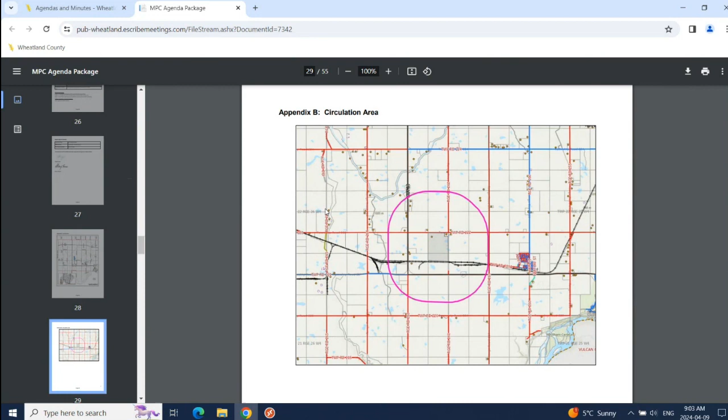Alberta Transportation and Economic Corridors said the Highway 24 recommended improvements identified in the TIA should be constructed prior to the opening day of the facility, at no cost to AT. A development application for the highway improvements should be submitted to AT, and the application for the highway intersection improvements should include detailed engineered plans: an asphalt pavement report, subgrade and gravel base course details, and any other applicable plans not mentioned.

CP Rail had no response. Fortis had no response. Rocky View County noted the project is outside of the IDP area, and since no concerns were raised during the redesignation, they were not circulated for the development permit. The comments provided during the redesignation were included in the development permit report.

During our internal circulation, we received comments from the manager of operations, who said it is recommended by the Transportation Department that all Highway 24 and Township Road 222 intersection improvements be completed as noted within the TIA and the AT permit. Though anticipated post-development traffic volumes fall slightly below the threshold for paving, it is recommended that paving of Township Road 222, from Highway 24 to the furthest east development access, be completed following reconstruction of the roadway by the county. It is anticipated that the maintenance demands of the roadway, if it remained gravel, would be greater than could be provided through the county's existing service levels.

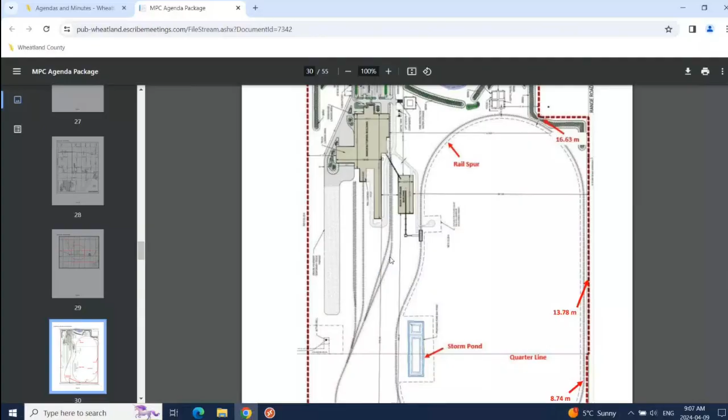On page 30, we have the site plan. A little description of the proposal.

The application proposes the development of a 220,000 square foot wallboard manufacturing plant, including an associated raw product processing mill and an enclosed storage facility for manufactured wallboard products. The facility will encompass approximately 214 acres of land, currently on 2 parcels. However, the applicant landowner is in the process of consolidating the 2 parcels through land titles.

Environmentally sustainable practices will be incorporated, including advanced environmental control systems to minimize emissions and a solar array for power supply. A separate application will be submitted for the solar array in early 2025.

The plant anticipates employing approximately 100 permanent staff members working in 3 shifts. The facility will operate 24 hours a day, 7 days a week throughout the year. Customers will not interact directly with the manufacturing facility, so regular client-customer visits to the plant are not expected on a daily or weekly basis.

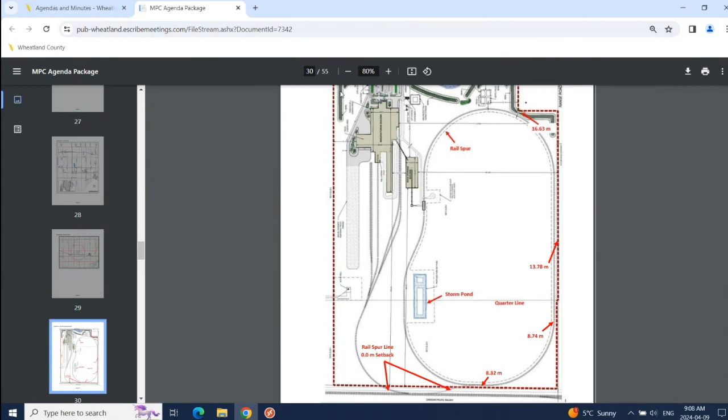A traffic impact assessment was submitted, which was reviewed by McElhanney Engineering, Alberta Transportation, and the county. It identified the largest traffic contributor to be employee traffic arriving and departing from their work shifts. Additionally, truck traffic is expected to be relatively steady throughout the day, approximately 5 trucks per hour.

The TIA recommended that improvements be constructed at the intersection of Highway 24 and Township Road 222. Although the TIA stated that the estimated traffic volume did not trigger the requirement to pave Township Road 222, the County Transportation Department noted that the TIA did not take the current standard of the road into consideration and did recommend the road be paved from Highway 24 to the furthest east development access.

There is a map to our site plan on page 30. There is an active CP rail line that runs from east to west immediately south of the development site. A direct rail connection, or a spur line, is being proposed for the site to transport materials and finished products.

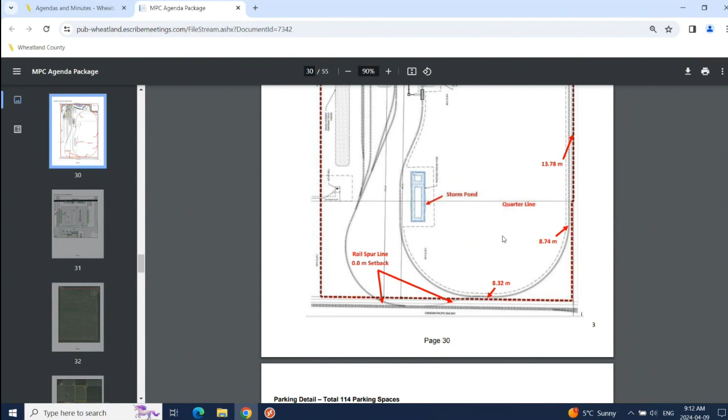Wastewater servicing and disposal is proposed by means of a conventional septic chamber system and treatment field to treat domestic wastewater from toilets, sinks, and showers in the office. The basis for the septic field design was the maximum daily population, estimated to be 119 people.

Wastewater generated during the manufacturing process will be captured and reused in the manufacturing process.

Stormwater management: a stormwater management system is designed to accommodate the 100-year storm event runoff, and it will be conveyed to the stormwater pond where it will be stored. The pond will permanently maintain a certain level of water, but after a rainfall event, the excess water will be discharged to vegetation on site. It will be monitored, sampled, and analyzed to ensure it meets applicable requirements before being discharged to landscaped and vegetated areas to allow for recharging of the shallow groundwater aquifer.

The landscaping and mitigation plan: a plan was submitted in support of the application, which includes extensive tree planting and berming. The plan was developed in alignment with the mitigation strategy outlined in the area concept plan and complies with the county landscaping and screening guidelines. Further details regarding the mitigation strategy are found in the policy analysis section of this report.

A construction management plan was submitted in support of the application. On-site stripping and grading would proceed upon the effective date of the development permit. Further construction activities will commence once the applicable agreements have been executed. The plan included strategies related to mitigating potential impacts related to dust control, turning off equipment when not in use, vehicle maintenance, containing runoff, covering trucks leaving the site, and regular site cleanup and washing truck wheels prior to leaving the site. A condition has been added to address construction hours in accordance with the county noise bylaw.

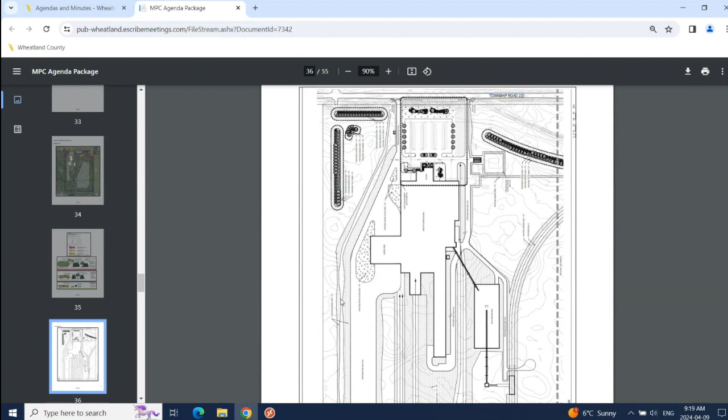Following discussions with neighboring residents who had raised concerns after receiving the circulation notice, amendments were made to the landscaping plan. MPC has received a copy of these amendments, but I will outline the changes for you.

Did MPC want me to read the entire email that came from the applicant or just review the changes? I believe we got it in time, so if you just review the changes, that'll be fine for everybody.

One of the landowners, after meeting with CGC, considered that the tree height atop some of the landscape berms at time of initial planting would not break up the bulk of the processing plant when viewed from his house to a level he's satisfied with.

The amendment was that CGC will replace 50% of the proposed 3-foot trees with 6-foot trees for a linear length of 50 meters along the northern boundary, starting in the northeast corner. So in this area here, they're going to increase the tree height at planting.

The applicant notes that this amendment combined with the 6-foot high berm will provide a screening height of 12 feet at planting. Together with the proposed irrigation system, this will help ensure trees quickly establish and gain further height. One of the other respondents they met with expressed a desire to continue to have a view corridor into the site.

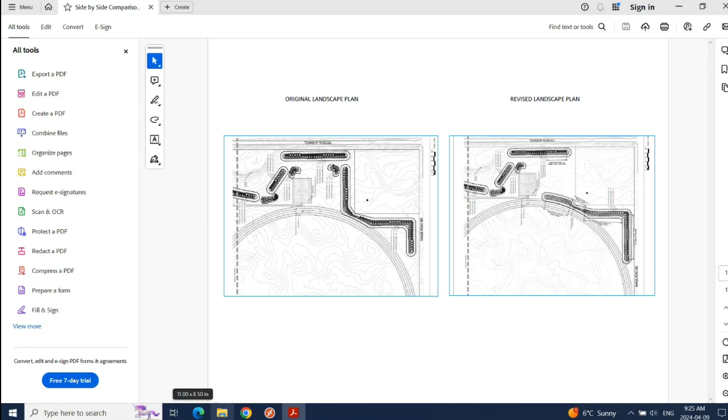I'm going to go back to our drawing on page 30.

Regarding variances, there are several required to accommodate the infrastructure and facility on this site. One is to the stormwater pond setbacks, as it is positioned in a location which straddles the property line between the northeast and southeast quarter. So a variance to the setback to the property line has been proposed. The applicant intends to consolidate the two parcels to create one large parcel, completed directly through the land titles office, and once the new parcel boundaries are registered, this variance would be moot. Here is the property line, the quarter line, and this is the storm pond. You can see the property line runs through it.

The railway spur setback relaxations: the rear property line is shared by CP Rail, and the spur line needs to cross over the property line to connect with the CP Rail main line. The land use bylaw requires a 3.05 meter setback from development to a property line not adjacent to a road allowance. But due to the rail spur line connecting to the CP Rail line, it must cross the property line shared by CP Rail to the south, requiring a variance allowing a 0 meter setback to the property line on the south. A variance allowing a 0 meter setback to the property line between the two quarters is required to allow the rail spur line to cross over between the two parcels. Again, once the two parcels are consolidated, this variance would no longer be required.

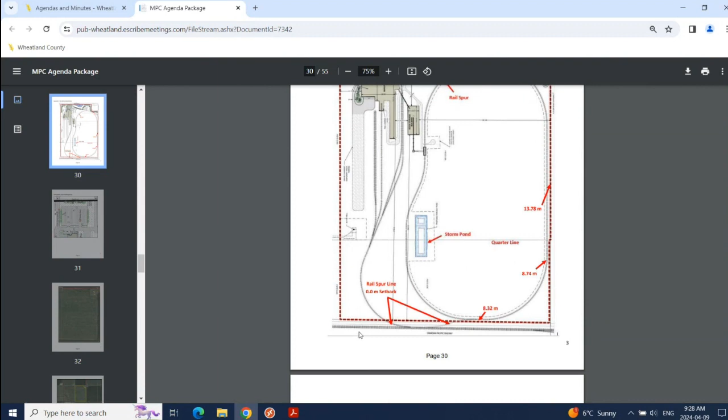McElhanney reviewed the assessment and has no concerns with the proposed reduction of the parking requirements from 220 to 114 based on the rationale provided. The rationale was that the assessment considered the start and end times of employees who will be working in 3 shifts and prepared for the maximum overlap in parking demand.

Land use bylaw section 4.3 grants the development authority the option to approve a development permit even though the development does not comply with the land use bylaw, if those variances would not unduly interfere with the amenities of the neighborhood, materially interfere with or affect the use, enjoyment, or value of neighboring parcels, or the proposed development conforms with a similar use prescribed for that land. Staff is satisfied that the variance requests meet the criteria outlined in section 4.3 of the land use bylaw.

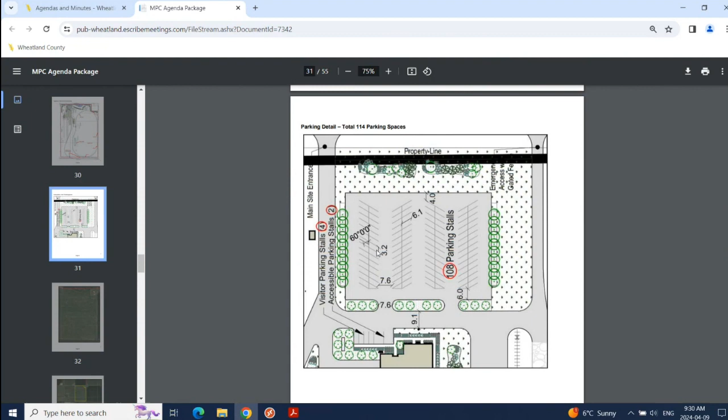Staff are recommending some amendments to the conditions, which I will outline for you after further consideration.

Oh, where are we here? There we go.

I'm going to show you the tracked changes so you can see the changes, and then I'll show you what it looks like once we've accepted them. First, this I had put as an intensive industrial business, but that's actually the zoning—it should have said a heavy industrial business to comply with the uses in the intensive industrial district. So I just tweaked that.

Condition 12 is about the development agreement and the items to be included in it. We had originally said that paving of Township Road 222 would be the applicant's requirement, with securities required. However, upon further consideration, since we will be reconstructing that road, we will undertake the paving but put the costs into our cost contribution agreement, which is condition 13. So the developer's proportionate share of the cost of the raw water supply pipeline and the full cost of paving Township Road 222 from Highway 24 to the furthest east road approach to the development has just been moved in the conditions.

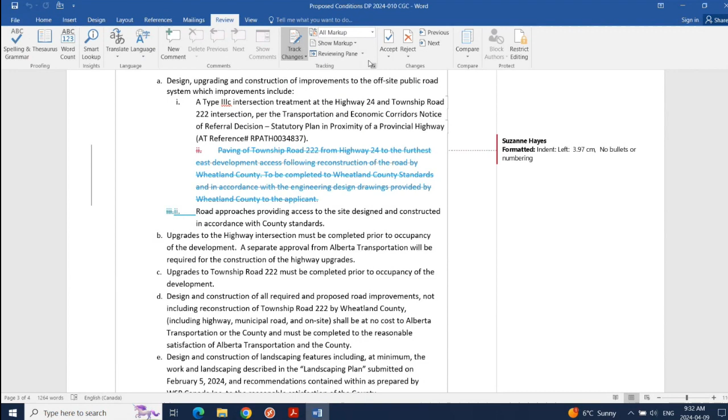So if we just look at the no markup version, now we can see it with the changes.

I will just finish up my report. The standard 3 options for MPC to consider are on page 26. And that concludes my presentation. Please let me know if you have any questions.

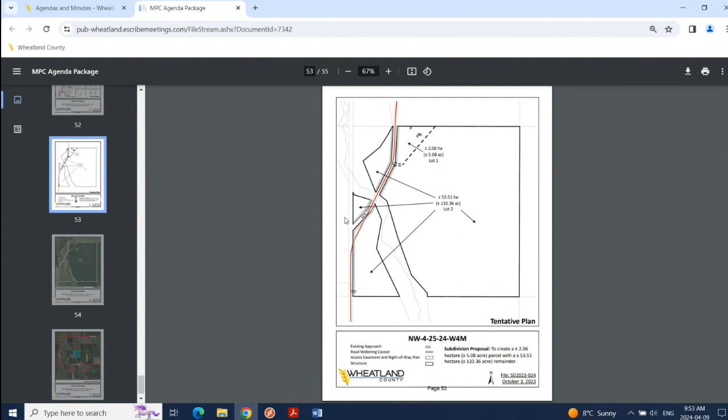We can see here on page 53, Range Road 244 was partially constructed outside of the dedicated road right-of-way and through a portion of the remainder Lot 2. Administration has included conditions that support the realignment of the road right-of-way in the future.

The application was circulated to external stakeholders and neighbors, and no objections were received by the county. Generally, the proposal aligns with the provincial and county statutory plans, as well as the county's land use bylaw. Dedication of municipal reserves is not required for this proposal, as it considers the first parcel to be subdivided from the quarter section.

With that, administration is recommending that MPC approve subdivision application SD 2023-024, subject to the conditions found on page 47 of the agenda package, which I have up on the screen here. That concludes my presentation. I'd be happy to take any questions.

Thank you, Taylor. MPC's wishes? Yes, Member Clausen. Just a question I probably know the answer to, but the northwest corner of that quarter section, it's not labeled. Is that WID land, I would think, right?

Through the chair, yes. We have a spillway running from the northwest corner to the central south portion of the quarter. It's all registered in WID's name.

And we rebuilt this road, I'm thinking about 4 or 5 years ago. I'm just surprised we didn't catch that easement for the road then, because we did a construction project there and rebuilt it all. It could have been more than that since I've been on council. So I'm glad it's caught in here.